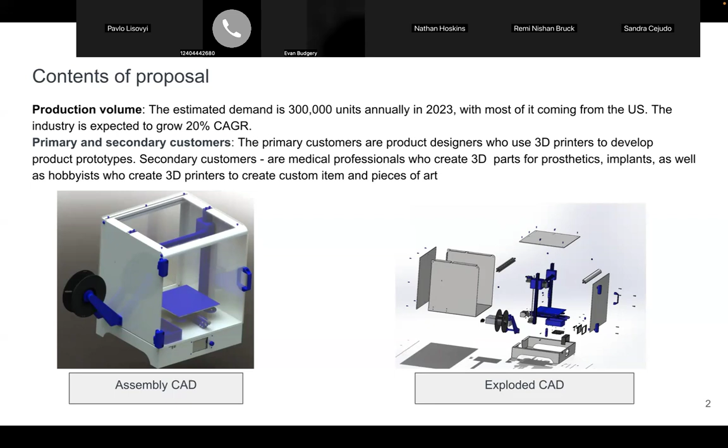Our primary customers are product designers for prototyping. Secondary customers are medical professionals for prosthesis and implants, and hobbyists as well for custom art and other items. Next. So here are our CAD models from our before and after for our primary and secondary. Next.

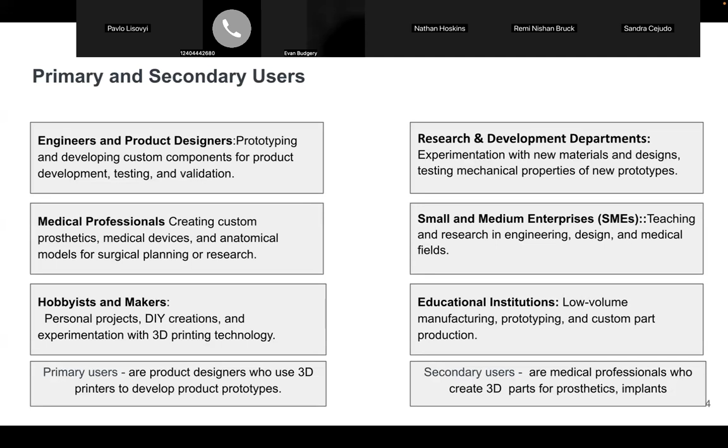Again, for primary and secondary users, we have listed engineers and product designers, medical professionals, hobbyists, research R&D departments, and small and medium enterprises, for prosthetics and implants again. So next. Going on to our product analysis.

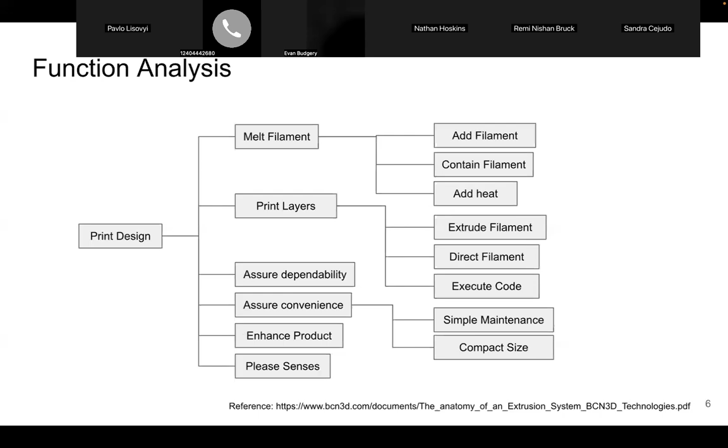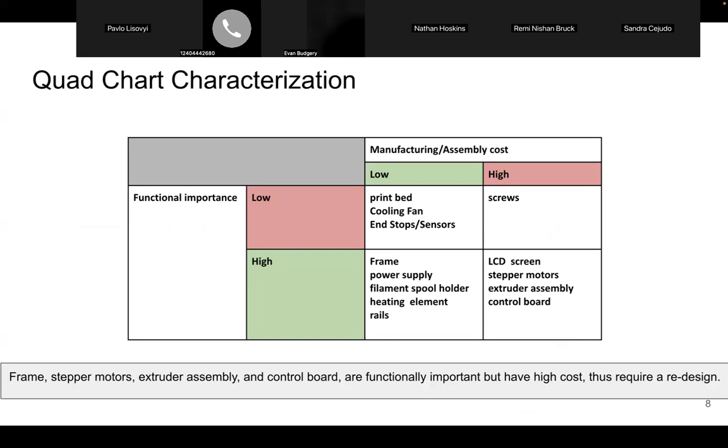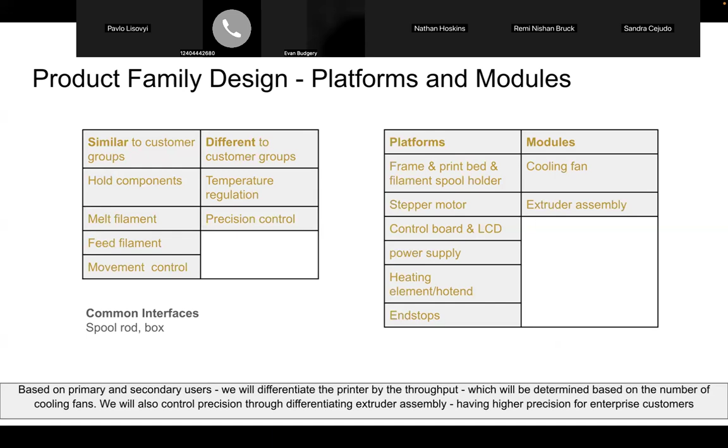Going on to our product family design. The functional designs are very similar, but the designs between primary and secondary consumers differ in terms of temperature regulation and precision control. Our design has modules for the cooling fan and extruder assembly, which makes it much easier to assemble the different designs within the family.

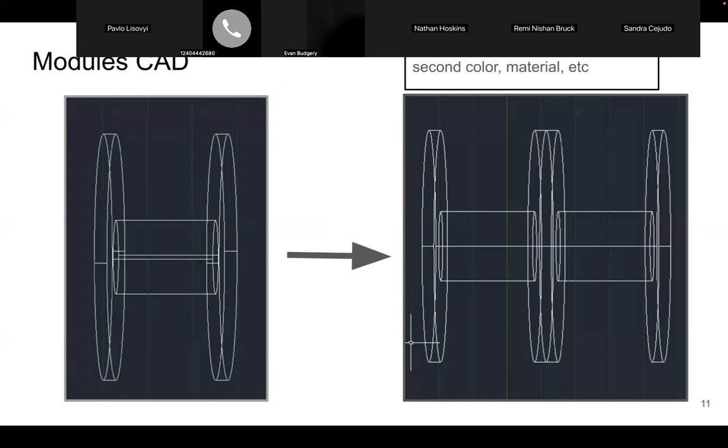Here are the CAD drawings for the modules. So our main module variant is the addition of this second spool to hold a filament of a different color or material. And then here's the CAD drawing for the common interfaces. Our common interface between the variants is the bar they rotate around. This remains the same between designs, and either one or two spools can be added.

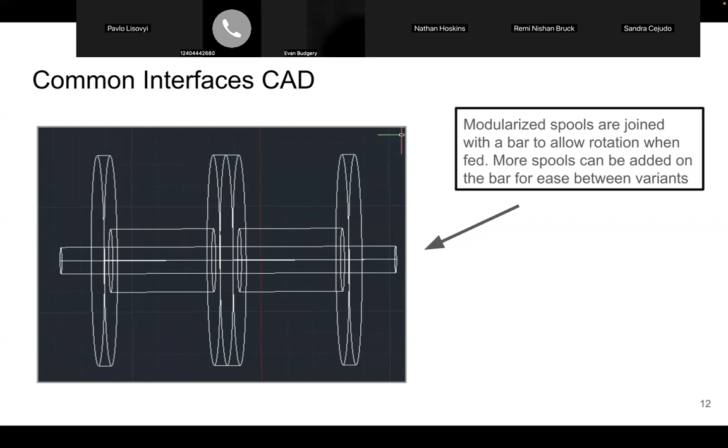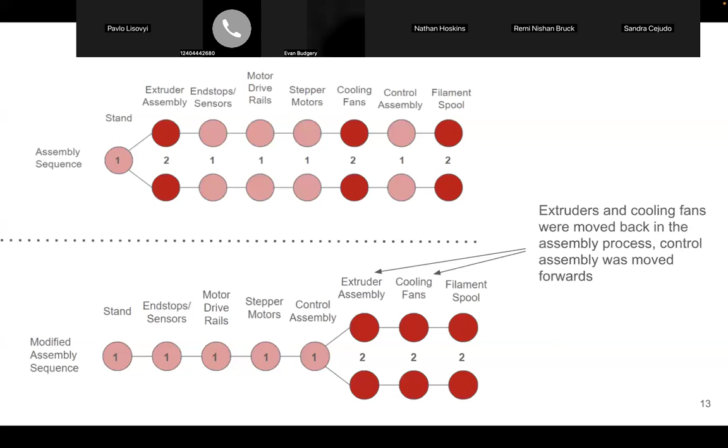For our assembly sequence, in order to decrease the number of nodes, we can use the modularity of the printer to our advantage by adding the extruder, cooling fans, and filament spools at the end of the assembly sequence. We are able to simplify our process, keeping a standard printer until the addition of the primary and secondary variations.

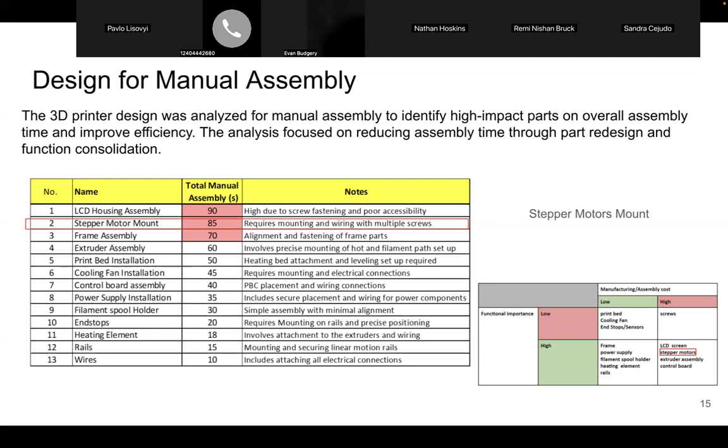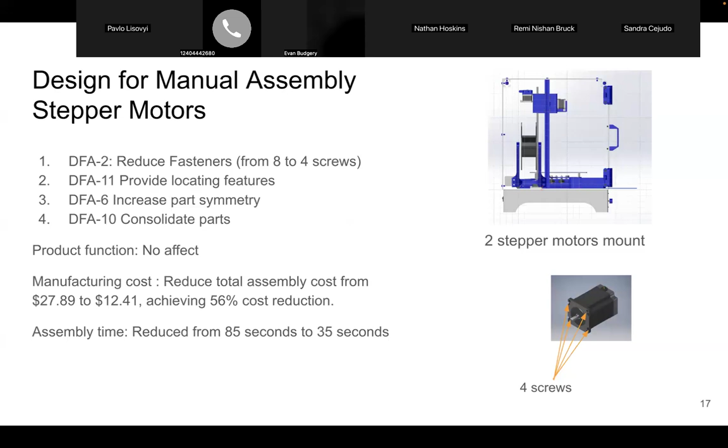The stepper motor mount redesign applies several DFA principles for improving the efficiency by reducing fasteners from 8 to 4 screws, adding locating features for better alignment, increasing part symmetry, and consolidating parts into a single piece. We streamline the assembly process. These changes did not affect the product functionality, but reduced manufacturing costs. Additionally, assembly time was cut from 85 seconds to 35 seconds, significantly improving the efficiency. Next.

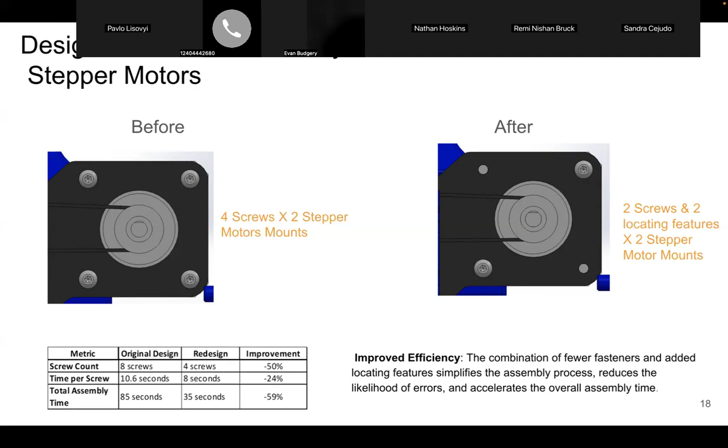The original design, as we can see here in the 3D CAD, used 4 screws for each stepper motor. Now the new design optimizes this by reducing it to 2 screws, which minimizes complexity and assembly time. 2 locating features such as chamfers or alignment guides are incorporated to ensure precise positioning of the motor during the installation, eliminating any alignment issues. Next.

Moving on to design for automated assembly, we analyzed the LCD screen assembly because it has a high assembly cost, high functional importance, and it's a small and lightweight assembly with three main components.

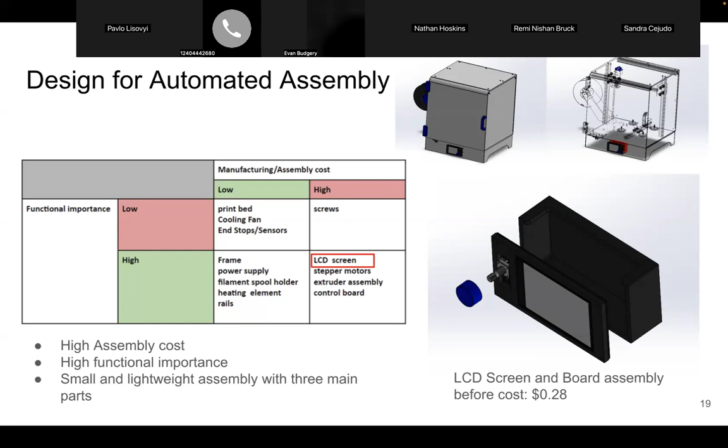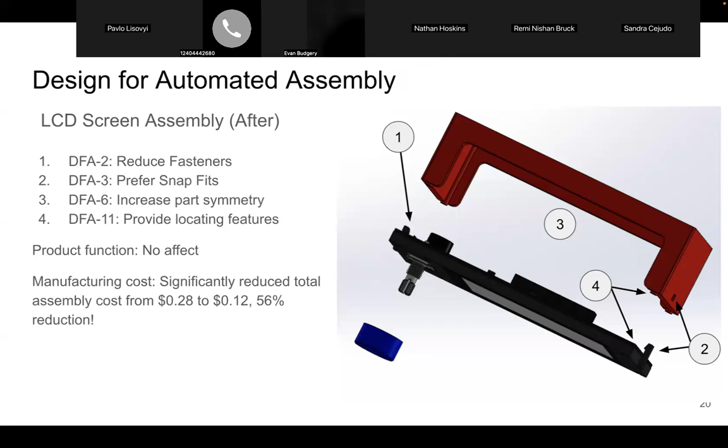We took the four DFA steps to simplify the assembly process. We reduced its fasteners, preferred some snap fits, increased part symmetry, and provided locating features. These changes provided no functional difference, but significantly reduced the total assembly cost from 28 cents to 12 cents, which is about a 56% reduction.

You could see the difference in the design before and after, increasing the part symmetry by adding the hole on the other side, getting rid of the long screw holes through the part and adding instead locating features, and then adding small holes on the sides of the part for the snap fits to snap into. And looking at the spreadsheet below, you can see how I calculated the percent change in assembly costs.

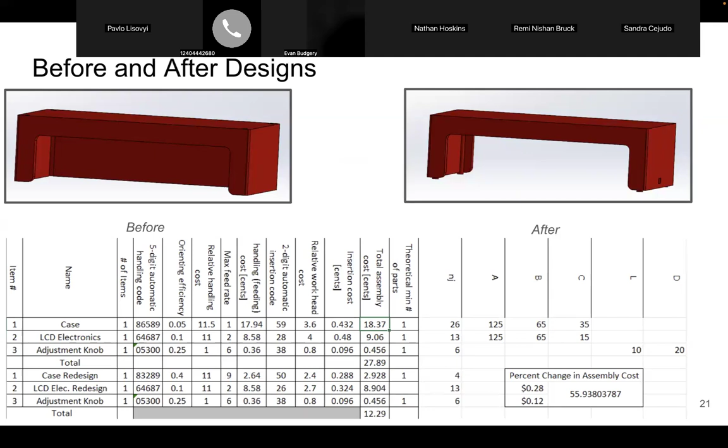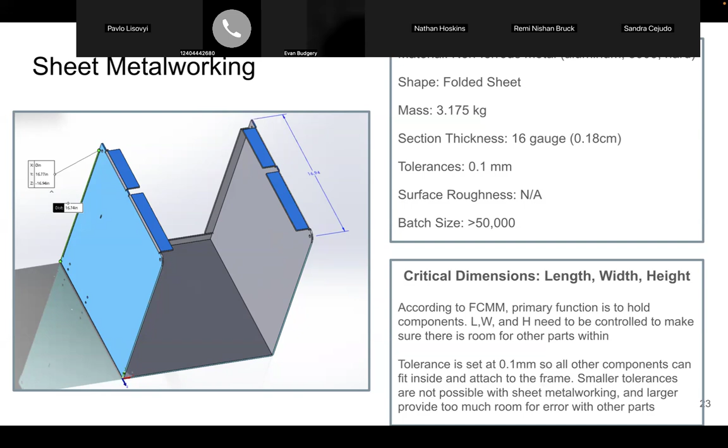Going now into our process selection. For the frame, we decided on aluminum for the material because it's both lightweight and can support the weight of other components. The critical dimensions here are length, width, and height, as the frame must hold all the other components inside of it. The tolerance is set at 0.1 millimeters to ensure a correct fit with all the other parts. Out of the processes compatible with aluminum on the shape, the only two that pass are sheet metal working and machining. And given the shape and the need to be bent, we decided to use sheet metal working here.

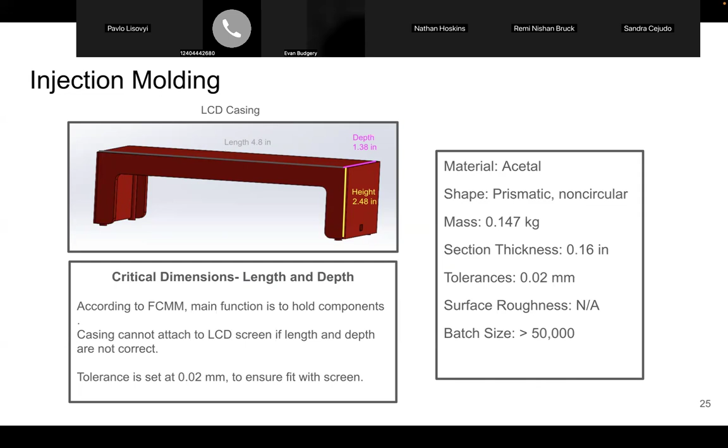For the LCD case, we decided to use a thermoplastic since it is lightweight but sturdy enough to protect components of the LCD screen. Critical dimensions here are length and depth as indicated on the drawing, and the tolerance is set at 0.02 millimeters so we can make sure the LCD screen will attach to the casing without issue. Most of the processes compatible with thermoplastics fail due to the non-circular prismatic shape. We selected injection molding over machining for the cost benefits and the need for less material in production.

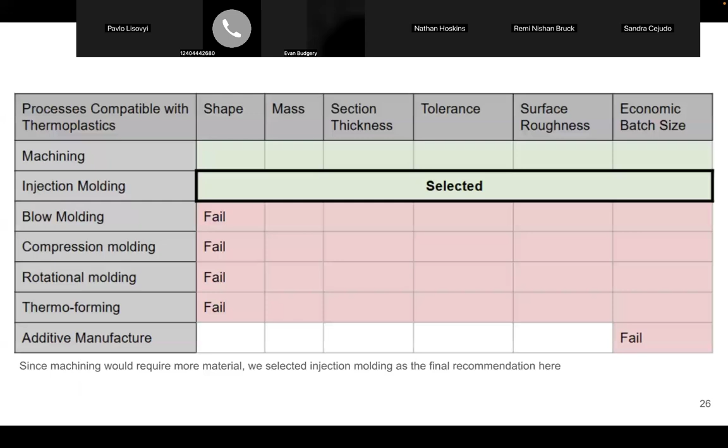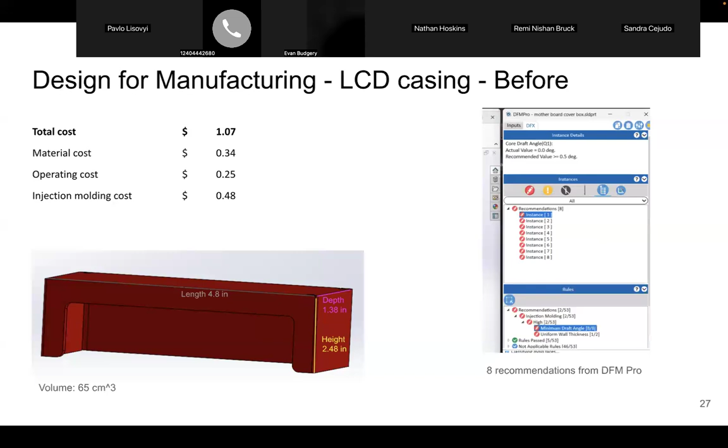In the LCD casing before DfM, we see that the total cost of manufacturing is $1.07, and that DfM Pro has 8 instances of recommendations for changes. Then after the redesign, we see the total cost has moved down to 80 cents, and the recommendations given by DfM Pro are significantly less. Once again, we achieve symmetry by removing the back panel and remove the screw holes for the top surface, and then added locating features instead, significantly decreasing both the manufacturing and assembly cost.

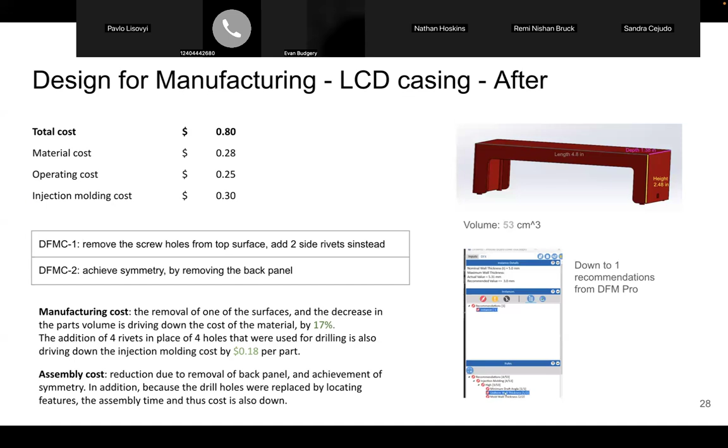Here you can see the DFM for the frame. The before cost was $10.62, and we only had one instance recommended by DFM Pro. Clearly after, we have reduced our cost by over half, down to $4.73, and that was by reducing sheet thickness and removing the side angle cuts at the sheet corners. As you can see, again, DfM Pro is still only recommending one.

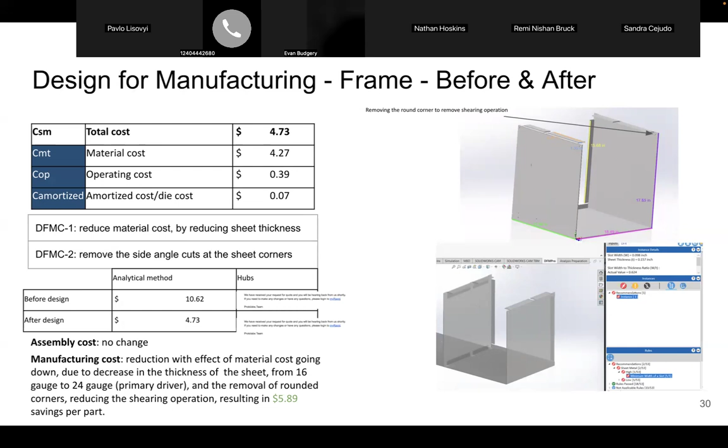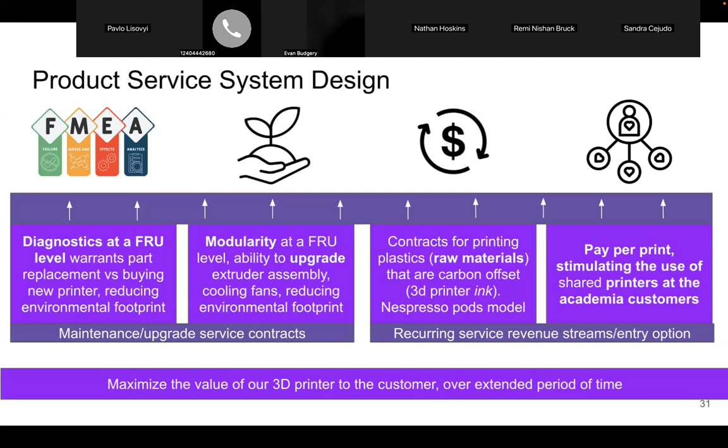Moving on to the product service system design, we have made sure that the diagnostics is done at the FRU level, which warrants the replacement of each FRU versus ordering the new printer. We also made the upgrades modular to make sure that we also extend the life of the existing machines. In terms of the recurring service revenue, we made sure that we create contracts for printing plastics, and we also made printing shareable by using a pay per print model, stimulating the use of shared printers at the academia customers. This ensures that we maximize the value of our 3D printers to our customers over an extended period of time.

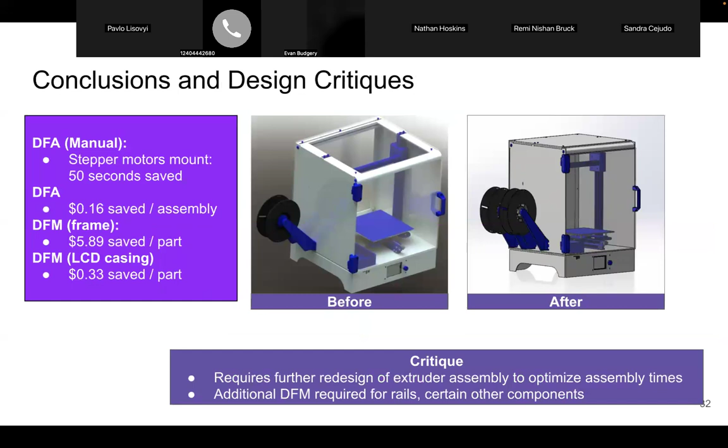Lastly, in conclusion, we have achieved a saving through DFA and DFM, and we have a few critic points. One is we would require further redesign of the extruder assembly to optimize assembly times, and additional DFM is required for rails and certain other components to further optimize.